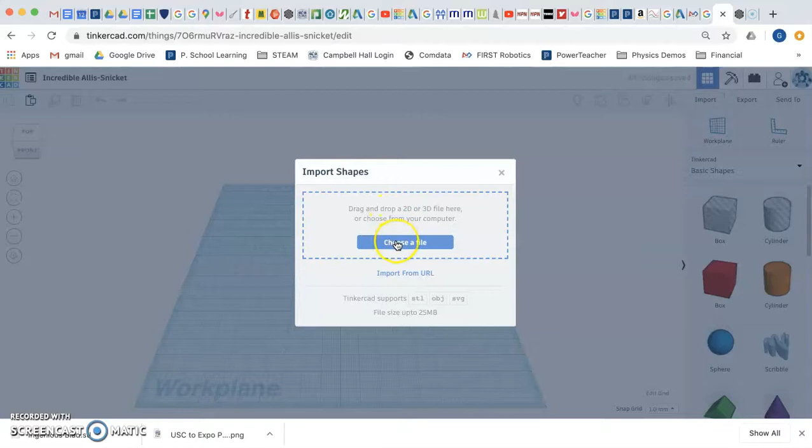And we'll import up here. We'll import our STL file that we've trimmed and gotten ready. Let's see. Here we go. And all this should be hopefully fine. It's going to import just the same size that it was when we scanned it.

It'll take a minute because it's a pretty big file, but as soon as it comes in, we're gonna basically figure out a way to separate it into two halves and have it so that the wood piece of the paddle can fit into it, sort of like a puzzle piece, I guess.

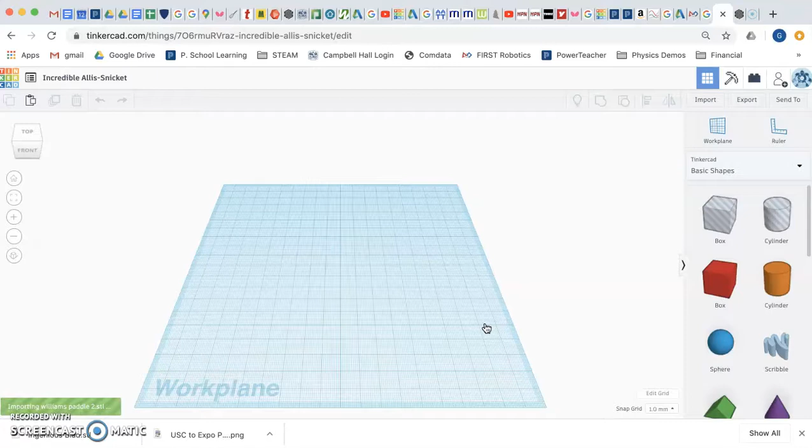I'm just waiting here. Let's see. Should be any second. Here it is. Okay, so this is my grip. It's a pretty subtle grip. I didn't go for a lot here, but you can see a couple finger indentations.

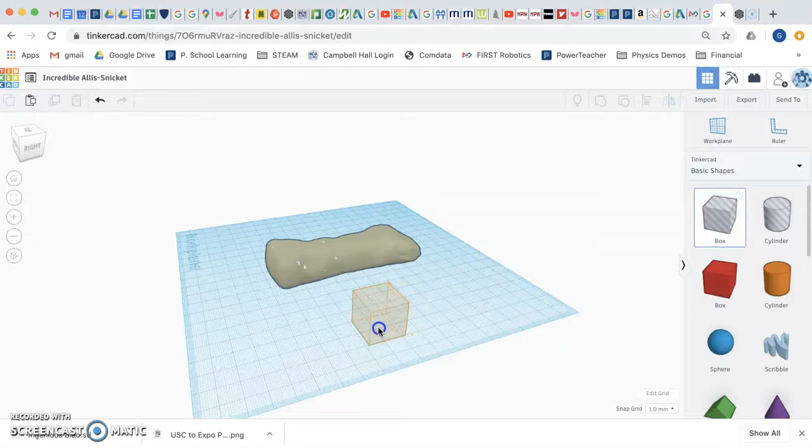So you're gonna drag over this box, which is a hole. So if we put it into here, it'll make a hole. And what we want to do is we want to shrink it down to 6 millimeters tall.

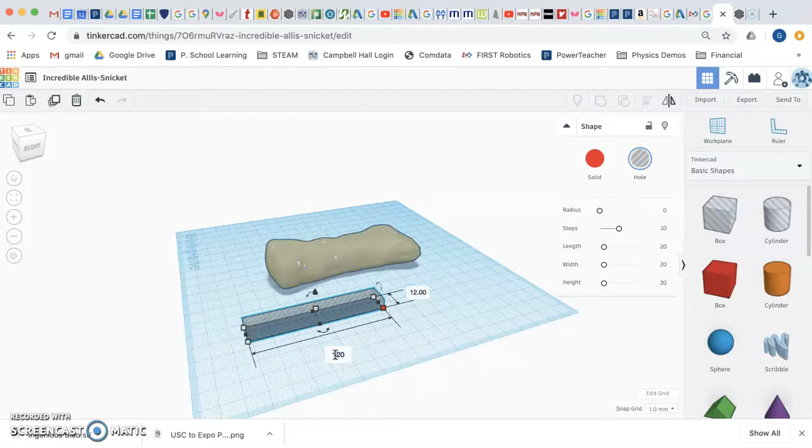And then we'll go for, let's say, 12 millimeters wide. That's about a ½ inch. And we want to just make sure it's extra long, so I'm going to make this like 120 millimeters. So we've got roughly ½ inch, that's 12 millimeters, about ¼ inch tall. That was our 6, and then plenty long to go through.

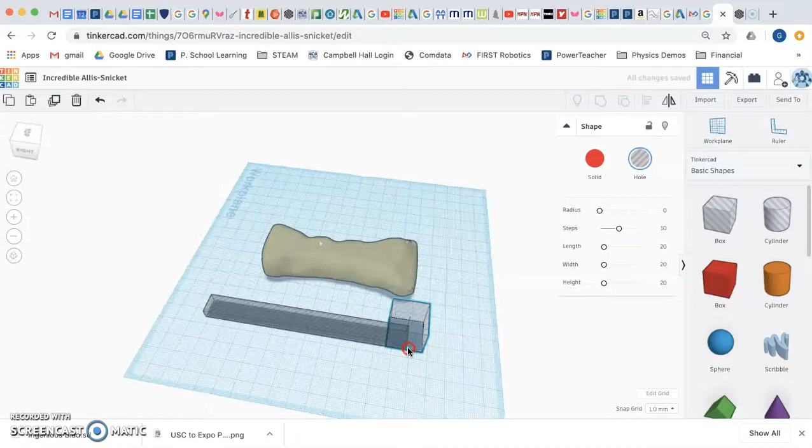Then we're also going to grab another box, and we're going to do the same sort of thing. We're going to bring it down to 6 tall, and then we'll just make this plenty wide in both directions.

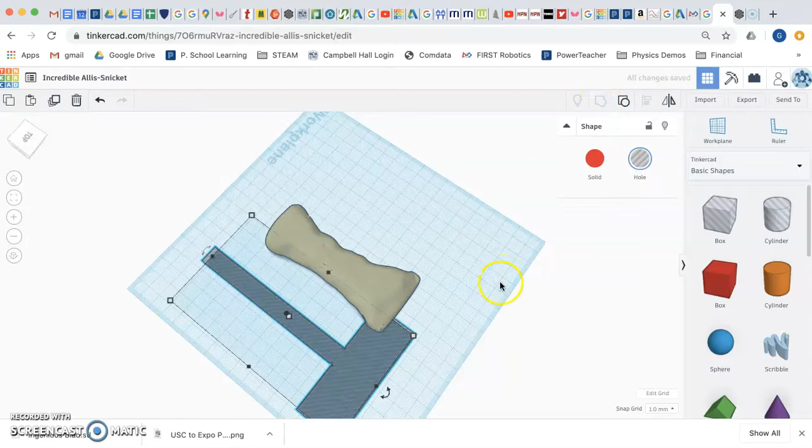And we're going to group these two together. So we're going to just highlight both of those, come up to here where it says group, click on that, and now they'll move as a single unit.

We're going to bring that over and we're going to raise it up. So to raise it up, we're going to grab this little black guy here, the black triangle, and we're going to raise it up, and we're just eyeballing this for now. We want to get this, first of all, we want to make sure, and I can use my arrow keys too. That's what I'm doing right now. I'm clicking over to get that hopefully lined up right in the center.

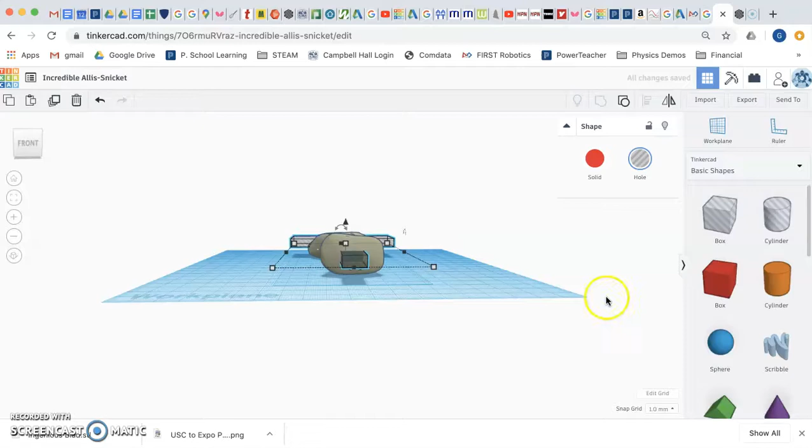And I just lost it here. I'm just going to make sure it looks like it's going through the center in both directions. That looks pretty good, right through the middle.

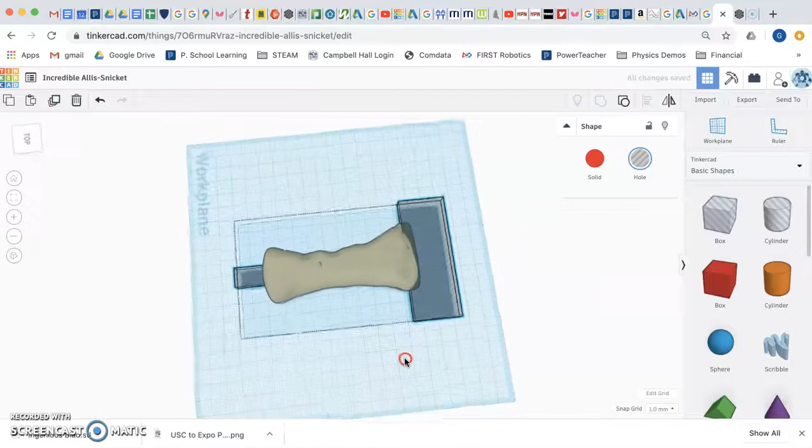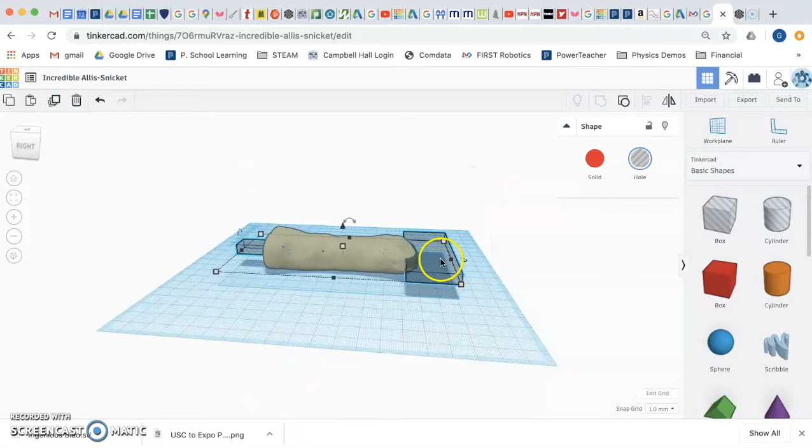And now I'm going to back this down, because you can imagine how the wood piece of the paddle, the handle, is going to come up through the center, and then it's going to curve out. So if we just had this thin guy going all the way through, it would not allow the curved piece of the paddle—it actually starts to flare out like this—it wouldn't allow that to actually happen. So that's the goal of this guy here, is to actually allow that wood part of the paddle to flare out.

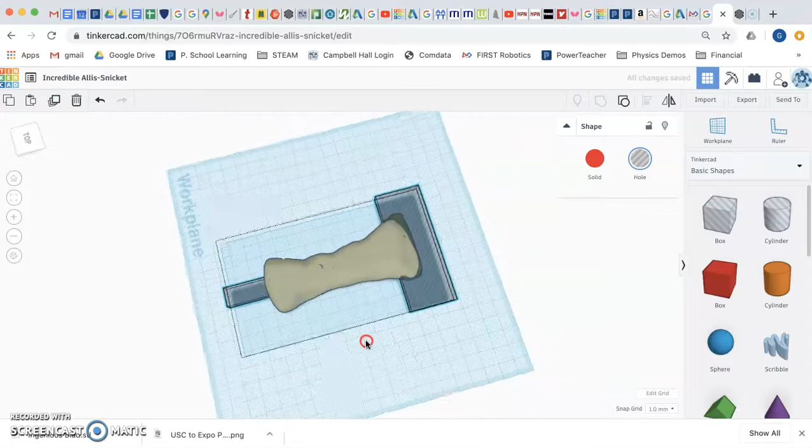And again, we're just going to eyeball it. I'm just going to bring it down. Better safe than sorry. I'm going to bring it down a little bit, maybe more than I need, to about—let's see, I'm going to keep going actually a little farther. About there.

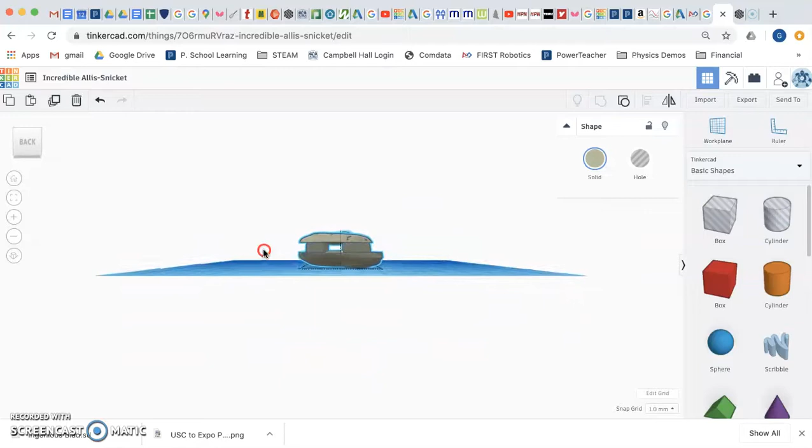So now I'm going to take all of this and I'm going to group together again, and you'll see what happens here. Boom, there it is. That looks okay. It's going to be a little bit tricky, I think, to get everything lined up perfectly, so do your best. Looks, I think, pretty good.

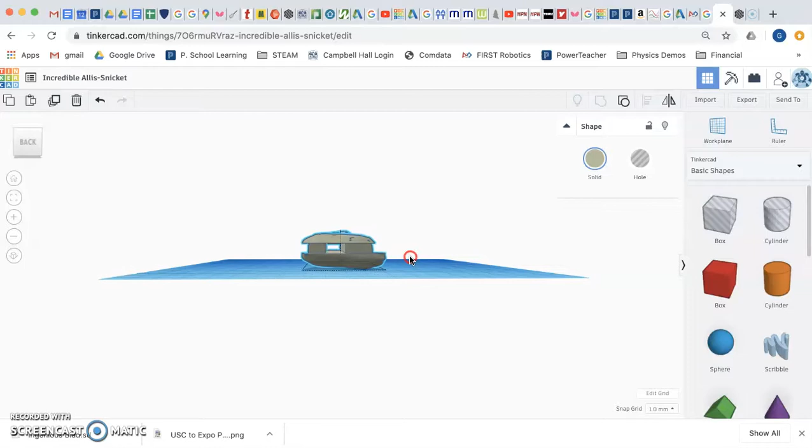So now the wood core, the handle of the paddle, will be able to slide down in there. But rather than trying to slide it down perfectly and print all of this as one piece, we're actually going to separate this into two halves. Before you do that, if you want to trim anything else off, like if you have too much material up here, you can just come in here and trim that flat.

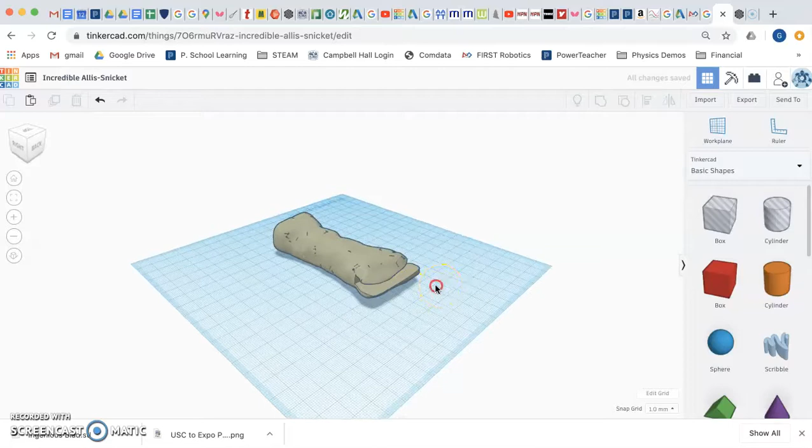I'm gonna call it okay as is, so I'll just go with what I have here. I'm gonna take this—everything's been grouped together. I'm gonna do a copy paste, Control C, Control V, and now I've got these two guys.

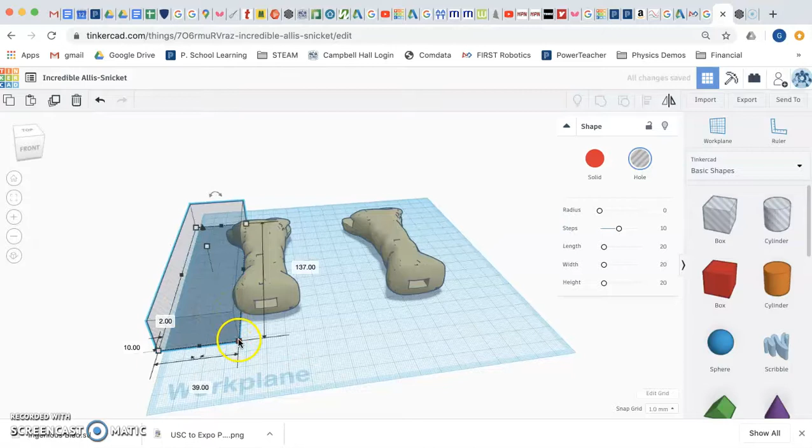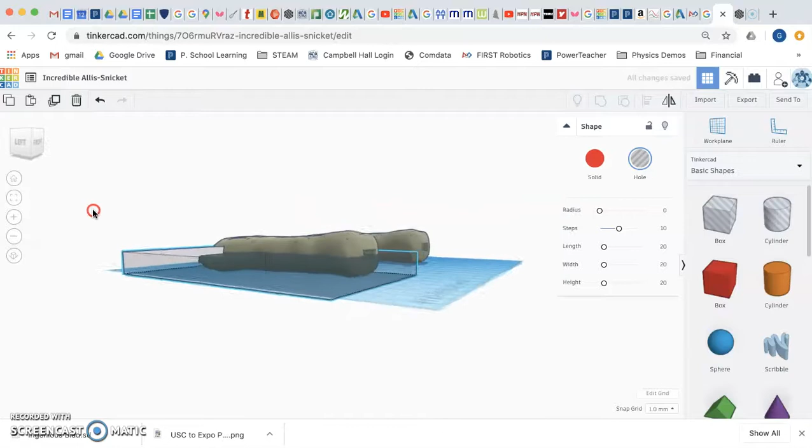Then I'm going to grab this, and I'm going to basically cut off the entire bottom of this thing. So I'm going to make this plenty big, and again eyeballing it here, I'm going to decrease the height so that hopefully I can get it right perfectly in the middle of everything. Does that look right? That looks pretty good, I think. I think that's about perfect.

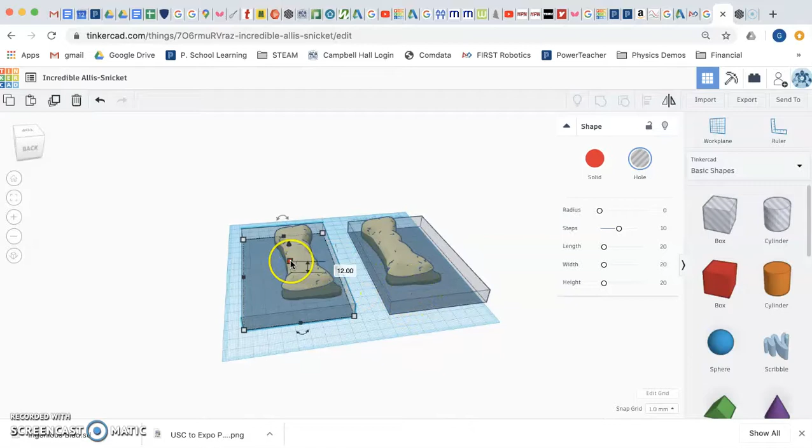And now, before I do anything else, I need to see—okay, that's exactly 12 millimeters tall. I'm going to copy that and paste that, and I'm going to do the same thing over here, except now I want to keep the bottom and ditch the top. So I'm going to raise this up exactly the height of the other one over here. So that's 12, I'm going to raise it up 12.

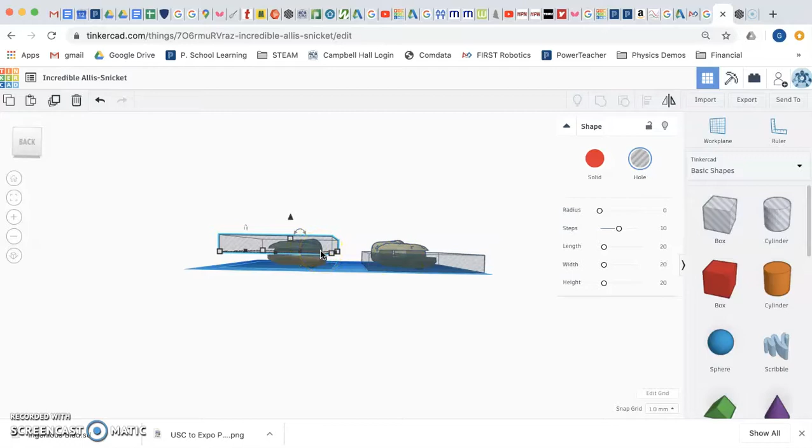So you can either just try to get it perfect here—you see this box over here that's telling me how high it went up, I can also just type in 12 there. So now if I look at these, where one cuts off, the other one leaves, basically, if that makes sense. So now I can group those, and I can group these.

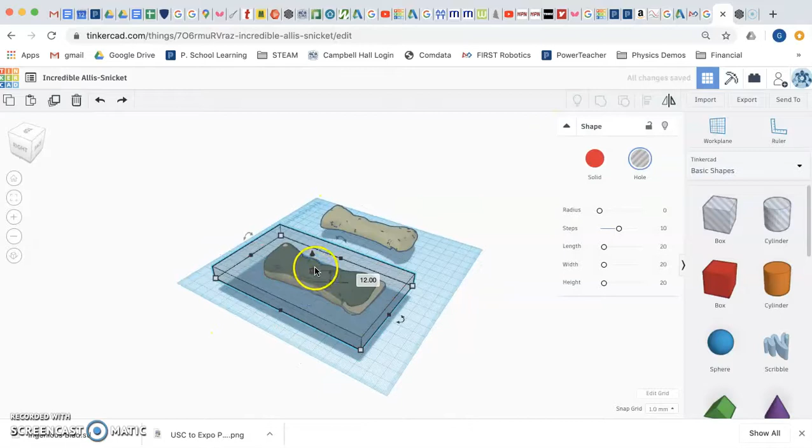Uh-oh, let me undo that. I didn't go up high enough. So I went up high enough, but I need to extend the top of the box higher, if that makes sense—it didn't quite catch everything. There's that little island right there. So I'm being careful there to leave the bottom of the box in the same place, but to make sure that I get everything on top. Okay, and now we'll group those.

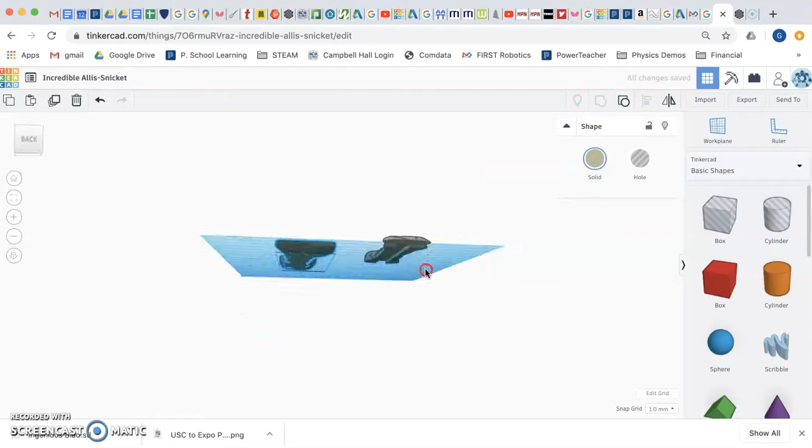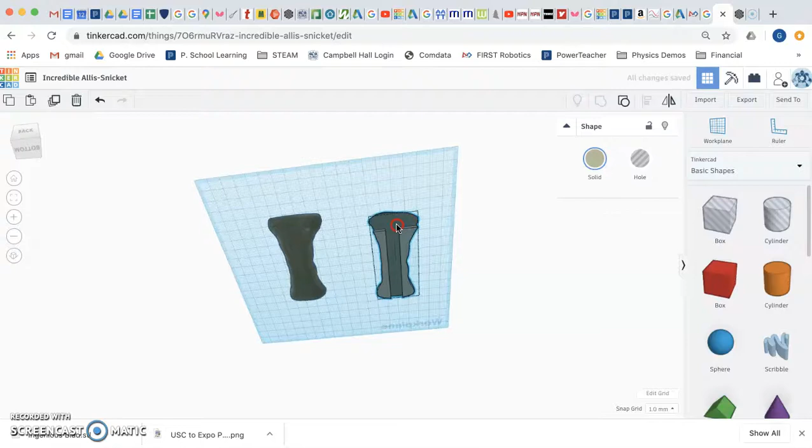Great. I'm going to, let's see—rather than try to drag this down and eyeball it, which I could maybe do, see if this works. Negative 12, right? Because we had it 12 up. I want to make sure that's on the exact right plane. It's hard to tell. I think it's pretty good. It should be, it should be.

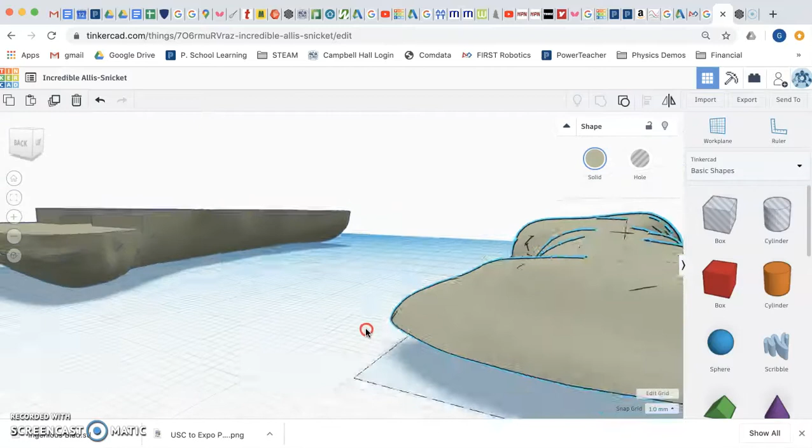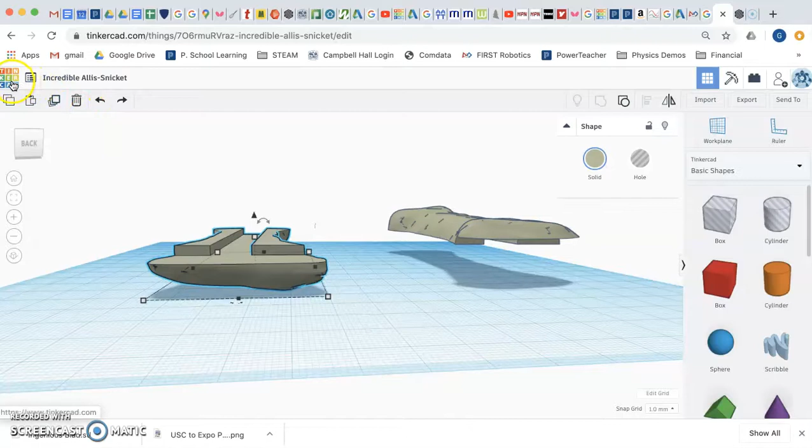So, but let me do—this is going to be a little bit better. So instead of dragging it down, I'm just going to leave it right there. So I'm gonna take this guy. I'm going to export these separately, so I'm going to make a copy here—just Control C, and then actually I'm gonna just cut it, Control X, so I'm cutting that out. I'm going to go back to my Tinkercad dashboard, create new design, and I'm going to paste it in there. Wait for it, there it is. Okay, so now I have...

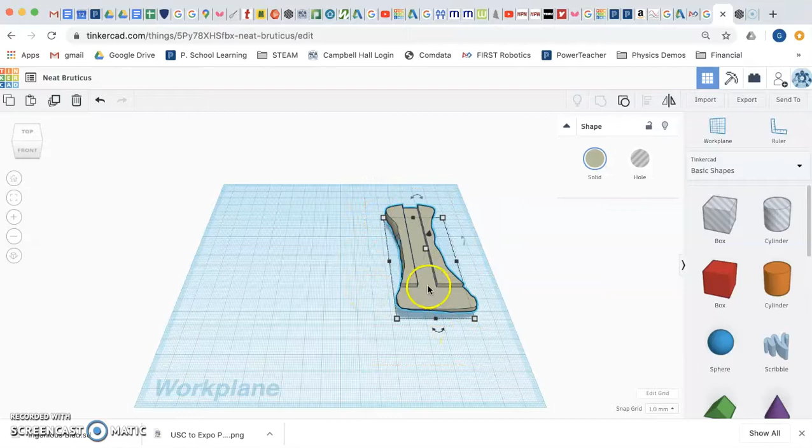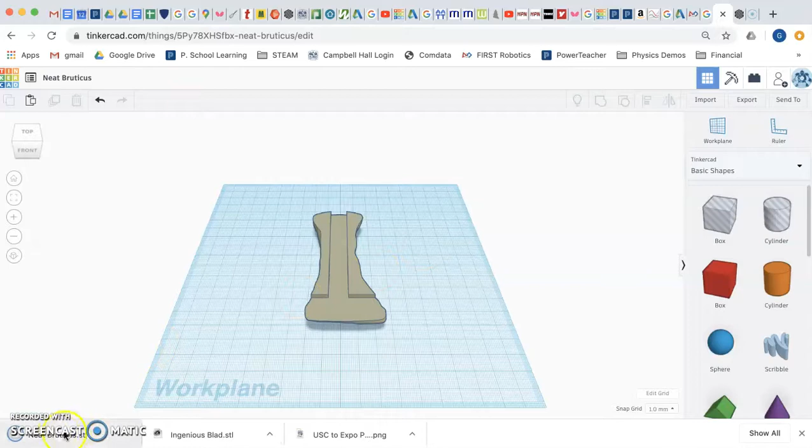There is an actually easier way to do this too, but let's just keep going. So there is the one side of the paddle, I can export that as an STL. And there it is, neat Bruticus. And now I can go get the other one, which was this guy. Okay, and I can export that.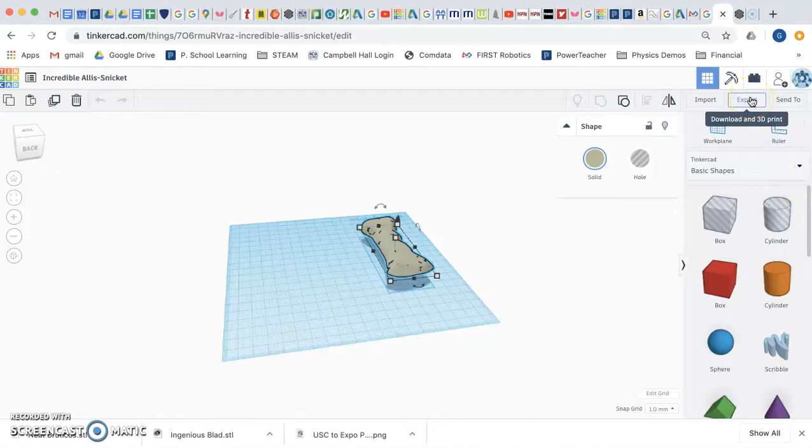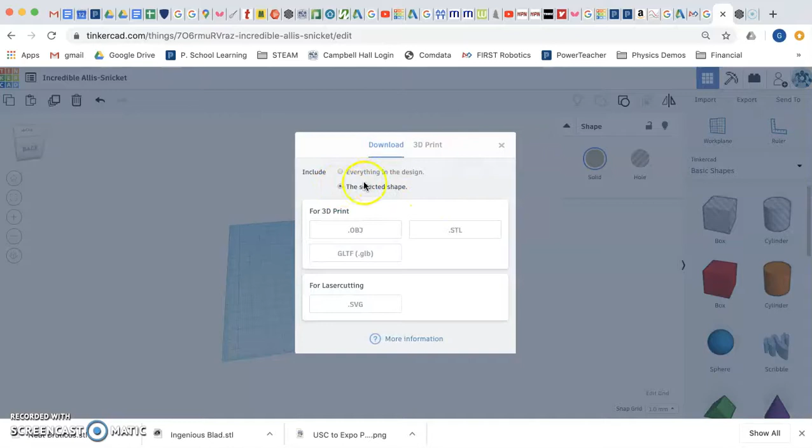The other thing that I can do is, instead of separating those two, I realized—if I had the other one here, let's just see if I can, yeah, here it is, I'll bring it back. Instead of separating them, it's a lot easier, I forgot about this, to just say that we're going to export the selected shape. So make sure that you've selected one, export it as an STL, and then select the other, export that as an STL.

Okay, so there I go. Incredible. It's going to be easiest if we just rename these the right thing before we export them, but I'll remember that these are my two guys here, one half and the other half. And then from here, we're going to go into Eiger next.